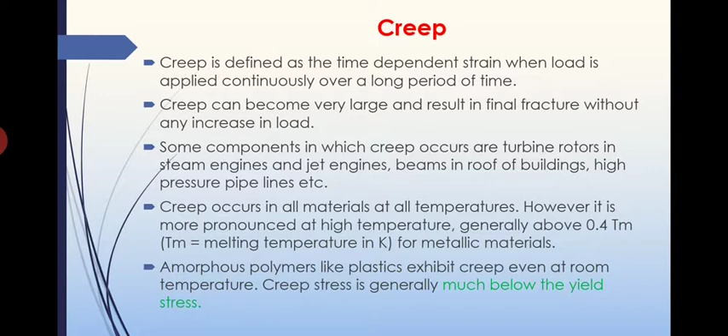Now coming to the creep curves. Creep curve shows the relationship between creep strain and time at any particular temperature. See, we are keeping the temperature constant here. At a constant temperature, we will be calculating that strain acting on a particular material because of a particular stress. Of course, stress is also kept constant. So the creep curve is that curve drawn with creep strain and time at a particular temperature.

A specimen is subjected to a constant stress at a constant temperature. The strain is measured with respect to time. So various methods are there to measure the strain. Of course, you might have done this experiment in the strength of materials lab. In the UTM machine, we can measure that strain using strain gauges. Directly we can measure that elongation, then we can calculate the strain also. Strain is change in length by original length, that we can calculate.

Creep strain at any instant has three components. One is elastic and plastic strain. Second one is steady state or viscous creep, we will call it, and the last one is transient creep. See, elastic and plastic strain is nothing but the strain happening within that elastic region, known as elastic or plastic strain. Initially this will happen.

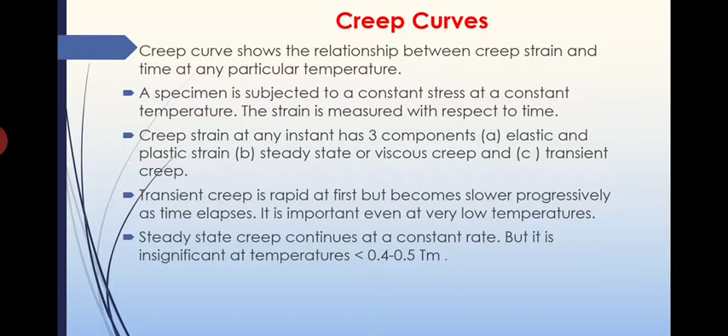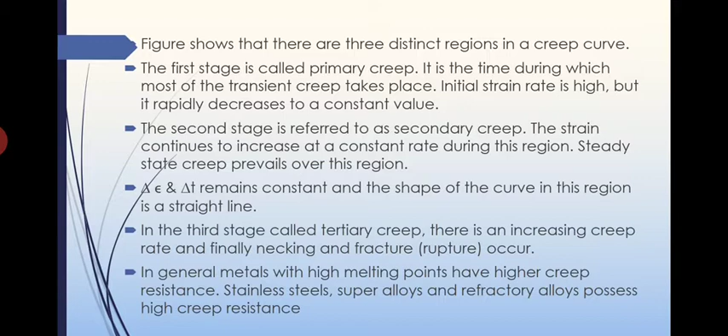Now coming to the creep test. See, in order to draw this creep curve, we must do the experiment, that is what is known as creep test. So in creep test, finally to draw the creep curve, what we require is the creep strain as well as the time. So we have to note down creep strain, how much straining is happening within the material.

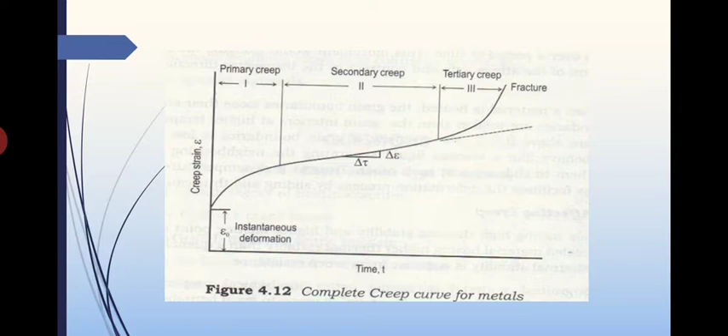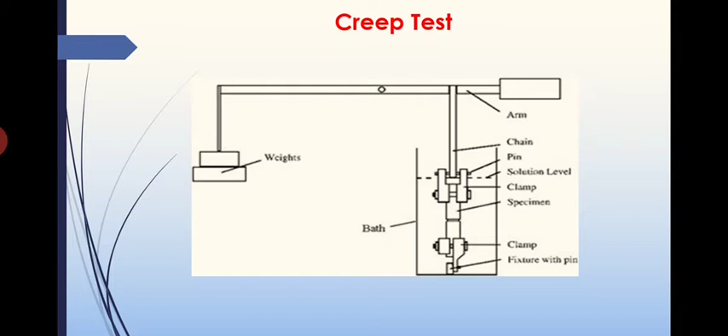Dead weight and system of levers help to maintain the constant load. See, some dead weight here, this is dead weight, and lever arrangements are there to provide the constant stress on the material. And for maintaining high temperature, the specimens are to be kept in a furnace or salt bath. Usually, if we are conducting the creep test at high temperature, then definitely a high temperature providing bath should be there around this material. That's why we will be keeping it in a particular bath.

Usually the bath will be either salt solution, or we will be keeping the specimen inside the furnace if very high temperature is required. So that is the function of the bath. Strains are measured using strain gauges or extensometers. Using strain gauges we can directly measure the strain developed within that material. That you will study in the mechanics of solids lab. Strain gauges you will be using, so once the labs are started, you can be familiar with that one.

Generally 4 or 5 specimens are tested under different loads at each temperature, then the temperature is varied and tests are repeated. So this is how we will be plotting the creep curve. Okay, so that is all about creep test.

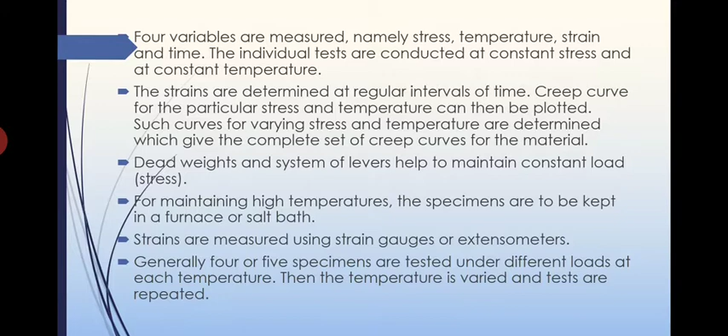Now coming to the structural changes during creep. Various structural changes occurring in a material during creep deformations are: first one is deformation by slip, the second one is subgrain formation, and the third one is grain boundary sliding. These are the structural changes happening during creep. These points we will be discussing in detail along with the next topic, that is mechanism of creep. Anyway, these are all the structural changes I will explain.

First one is deformation by slip. New slip systems become operative at higher temperatures. At these temperatures, slip occurs simultaneously on many slip systems. So one of the main reasons for the creep deformation is of course the slip planes or the dislocations within that material. That is the major reason for the creep formation or finally the failure. So the dislocations are one of the important reasons. At high temperatures, the slip systems become operative, and slip occurs simultaneously on many slip systems.

So once the slip is happening, that slip propagation, or we can say the movement of the slip or climbing of the slip, those defects you have studied in the first and second module itself. So that slip formation will actually contribute to the straining effect. That is one reason for the creep deformation, or deformation by slip. Many dislocations which are held at obstacles also get freed due to the climb. Net effect is that the dislocations move freely, causing creep strain.

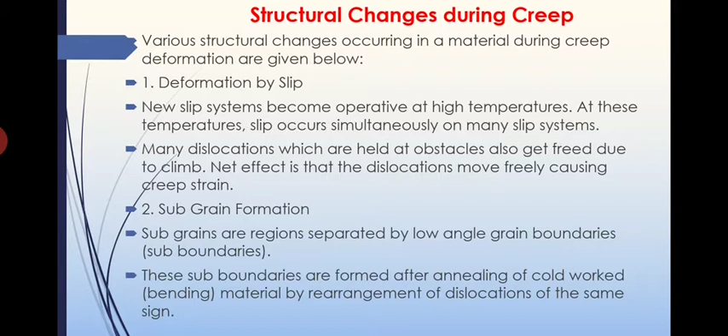The subgrain formation is another reason for the creep deformation, and finally the grain boundary sliding. See, because of the high temperature, the grain boundaries will act like a viscous fluid, and because of that, the grain boundaries will slide over each other. Because of that sliding motion, some straining is happening. That is also one reason for the creep. So these are all the structural changes happening. Now in the next presentation we will discuss in detail the mechanism of creep deformation.